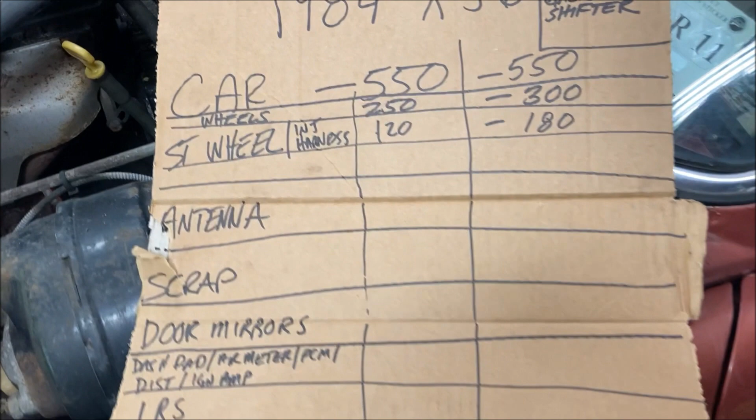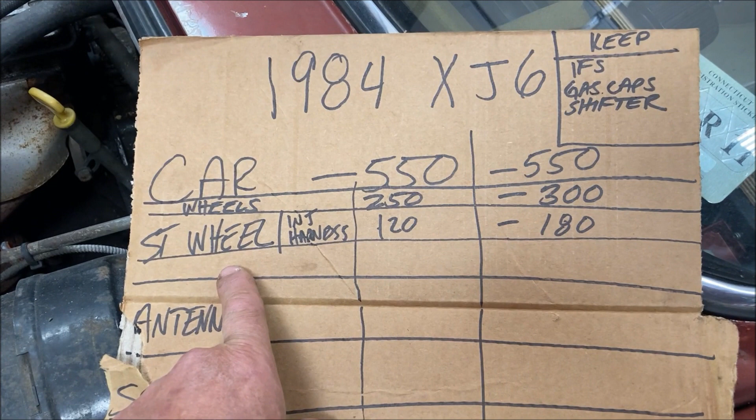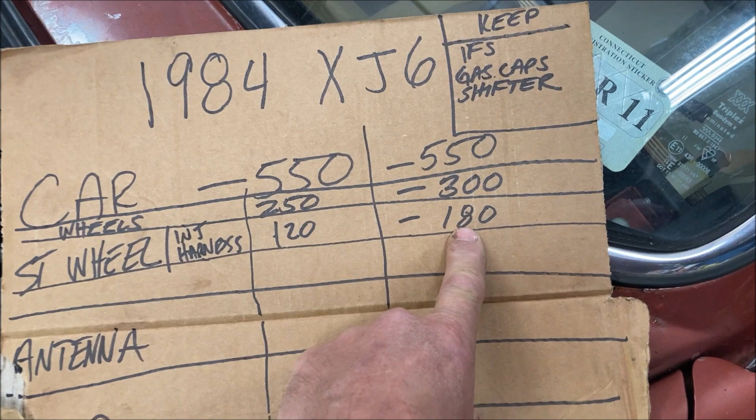This car did have a set of knockoff wire wheels on it, which were in nice shape. They sold right away. I threw them up for $250, they were gone. So that gets me down to $300 on the cost of this car. It also had a Nardi steering wheel in it that was beautiful, and I sold it cheap at $100, and the guy also needed an injector harness, so $120 for those. That gets me to $180 so far in this car, which means I have $180 invested in the front suspension. But we are nowhere near done yet.

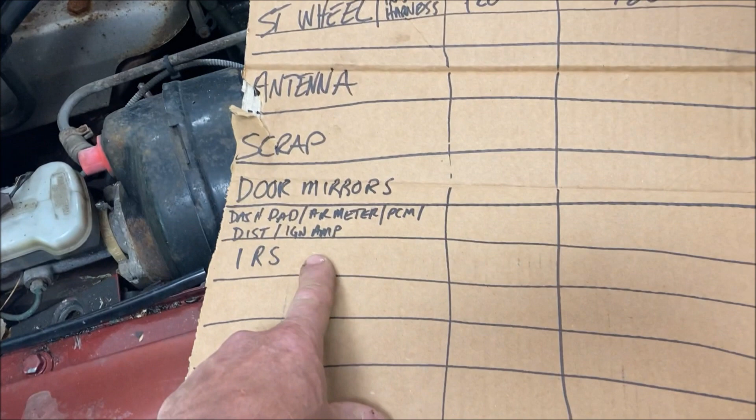I have people on the hook that want to buy some other parts, such as the factory power antenna, which is not very easy to find. This car has power door mirrors that all work, a bunch of miscellaneous things somebody wants, and we still have the independent rear suspension here to sell, which I normally sell at 250 to 300, and they sell pretty fast. So I'm not worried about it.

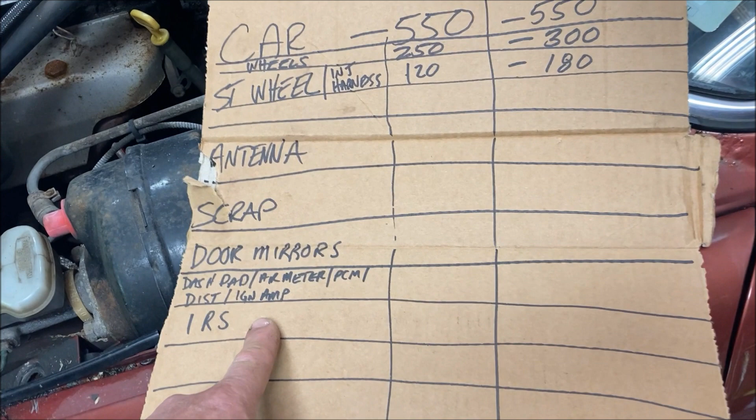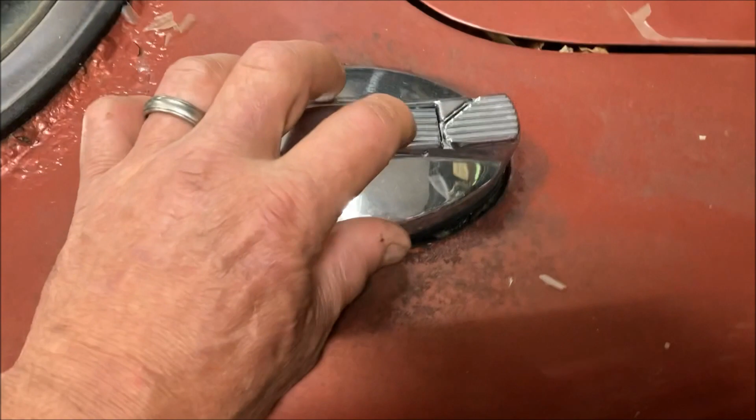So this car in the end is gonna help with the build a whole lot. Things we're gonna keep: not only am I gonna keep the independent front suspension for this car, we can keep the gas caps, because these Jaguars have two of these flip-up gas caps, and they're very cool. And I'm going to put one on this pickup truck, and I will show you how we do that.

The other thing I'm going to keep out of this car is the shifter. If you check out my little short I put up a couple days ago, these cars have a gated shifter, like a his/hers ratchet shifter, which is very cool. It's in there. It's a T-handle style, and I don't know if you can see the numbers on the shifter, but it has those lines around the 2 and the Drive. That's a ratchet shifter. If you push on that one way, you can bang it through the gears. I'll show you that a little later.

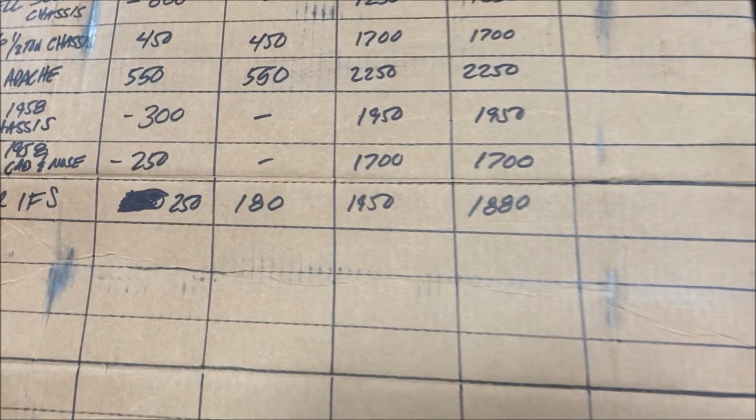Almost forgot, let's go over the numbers for the truck. This is where we are right now, and this is how things work when you do a build like this. So this is a 1956 Chevy half-ton we're building. But as I showed in the original video, we're talking three different trucks that are being used to make this. Here's how it all works.

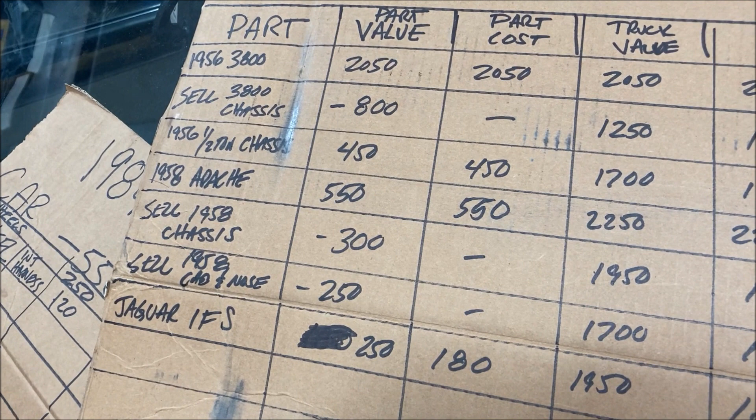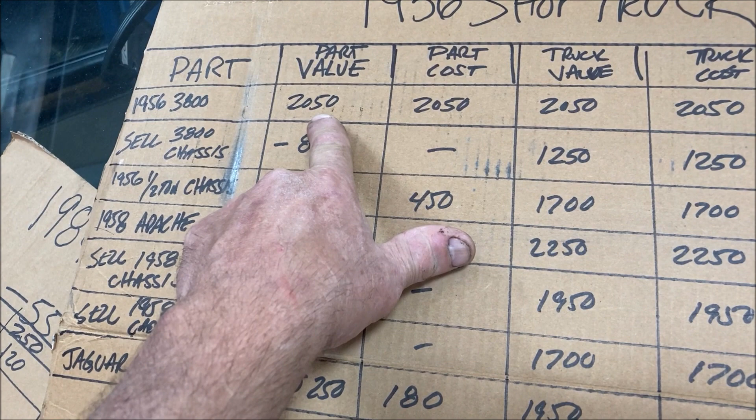The initial 1956 3800 I bought for $2,000 and $50 to go get it. Yeah, that's a cheap price, but that truck — this is why I tell people, don't give up on your project. That truck, somebody started taking it all apart to do something with it, gave up. Parts trucks or projects in pieces are not worth much. So I paid $2,050 for that, and you could probably do a lot better where you are, depending on what trucks sell for.

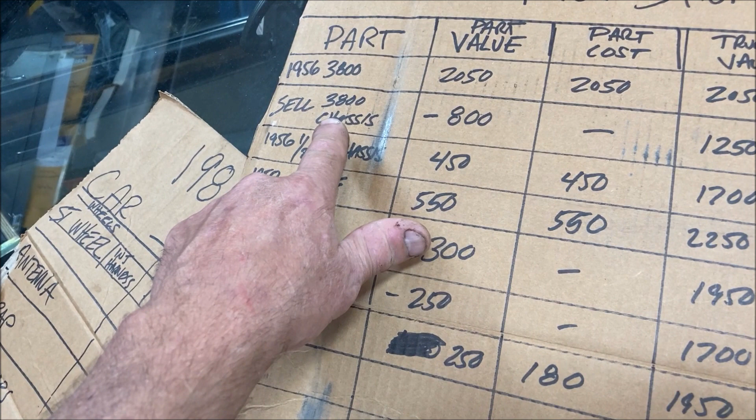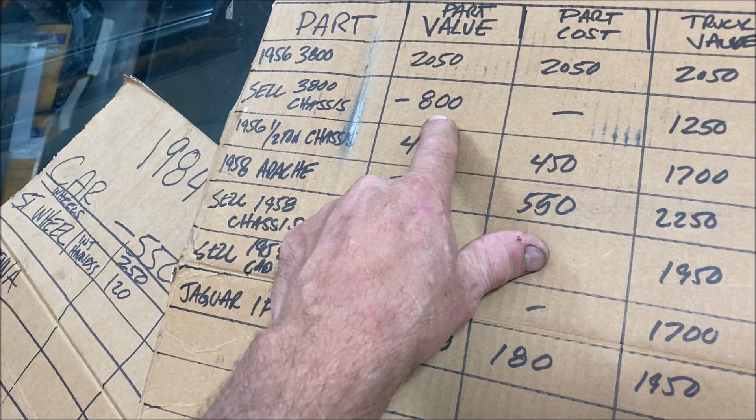But in the end, that's what that thing cost me, $2,050. Now, I'm not going to use the dually chassis. I'm going to keep that for the Mater build. That's got updated one-piece wheels on it, 19.5 tires, an $800 power disc brake conversion kit. It's got a lot of good parts on it. I think it's worth an easy $800 to call it as a value. I think if you wanted to sell that, you'd get $800 in a minute. So I'm going to call it $800, and I'm going to take $800 off the build because I'm not going to use it. That gets me down to $1,250 invested.

Then I had to buy a half-ton chassis. Found one on Marketplace, $450 with gas to go get it. Add that in, gets me to $1,700 invested right now.

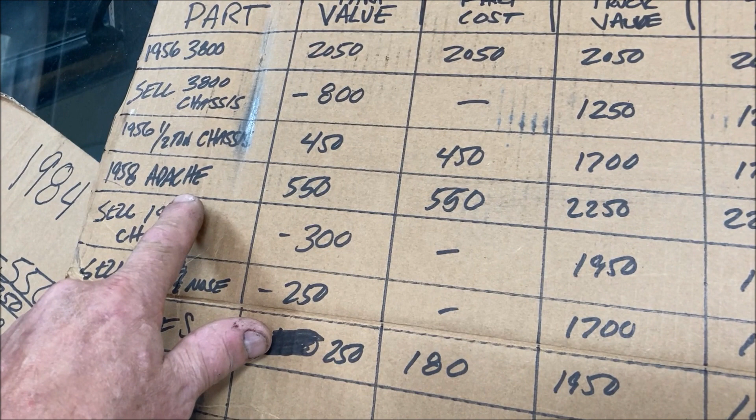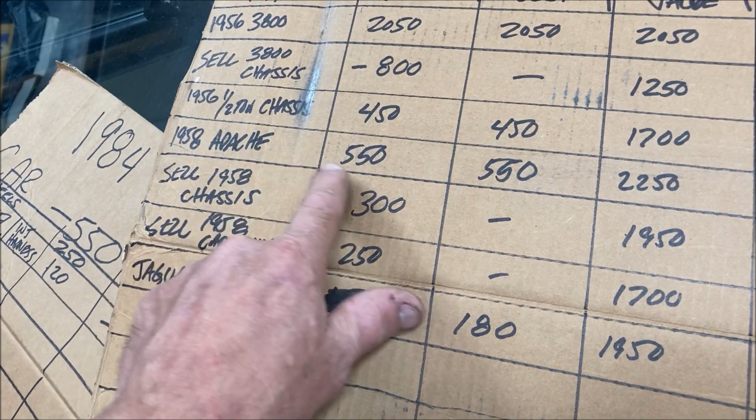Then we need a bed. I found this 1958 Apache. It's pretty roached, but the bed was the best part of it. And I can still use the cab for the Mater project, and the chassis is good. I paid $550 for that truck. Added in, gets me to $2,250.

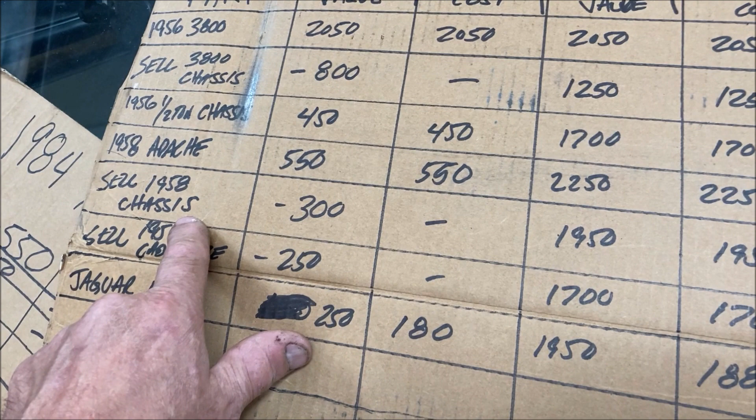As I just said, I'm not going to use the 58 chassis. I may put Corvette suspension on it, or I may just sell it as it is — I'm not sure yet. But it's easily worth $300. Take it off, gets me to $1,950 invested.

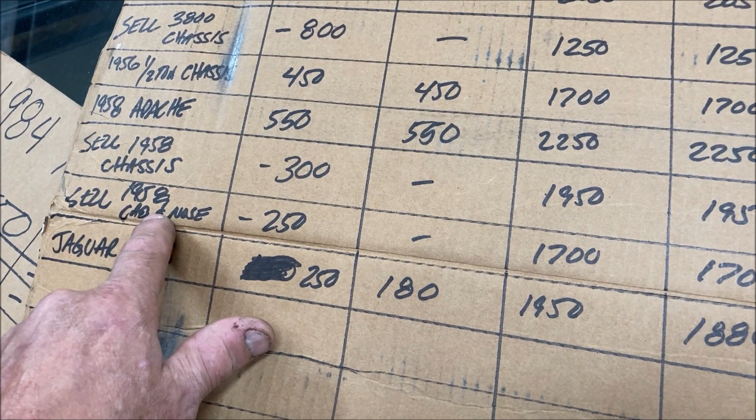I'm going to sell the 58 cab — well, I'm not going to sell it, I'm going to keep it. But I'm going to call it an easy value toward the Mater build of $250. Take that off, gets me to $1,700. So all in for the truck, the frame, and the bed, I'm at $1,700.

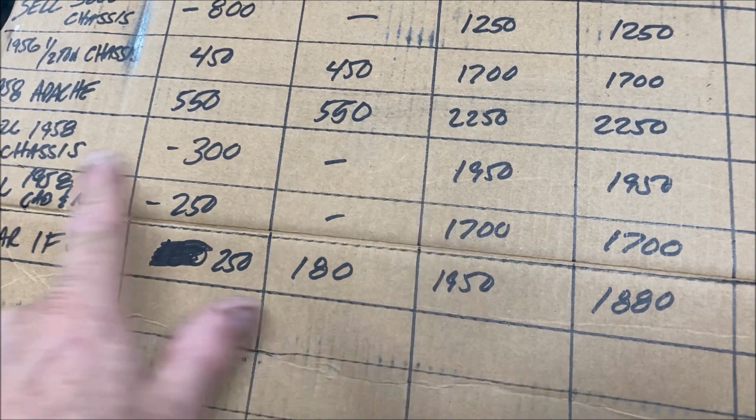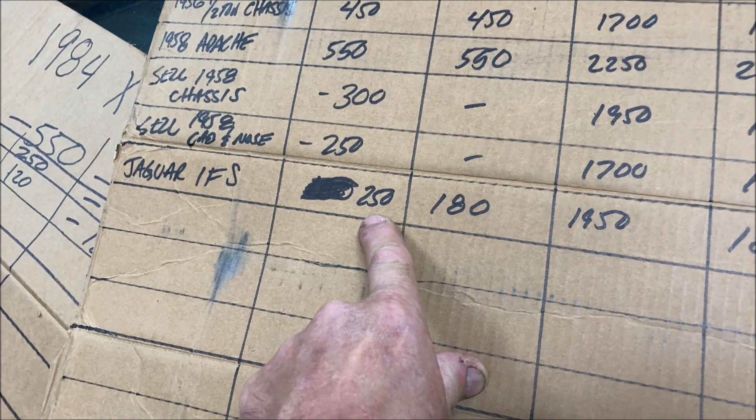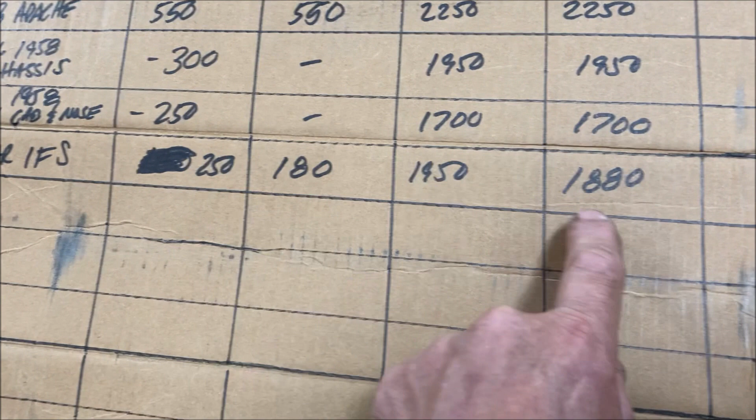So right now, out of my pocket, for the truck project and a front suspension, I am at $1,880. So that's how this is going to work. There's going to be parts that have a value and then the actual cost out of pocket. That's how I have to do it to make it a low buck build.

That front suspension, we're at $180 right now. I guarantee as time goes on throughout this build, that's going to go to zero, and the car will actually make money to offset the cost of the car. But that will happen. First thing I'm going to do is get this front suspension out of the car.

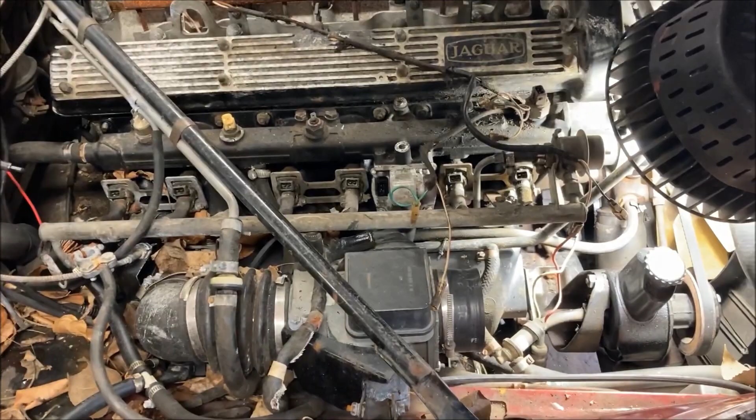All right, we're going to start under the hood of the Jaguar. Now I've moved the distributor out of the engine to make it a little easier to see what I'm doing here, but that's not needed. That's just mostly to get some space here so you can see.

First thing I'm going to do is disconnect the power steering lines. We have a return line here, just held with a hose clamp, and then we have the hard line here that threads into the back of the pump. This is just a Saginaw steering pump. Get some light down here. You can see the nut on the back of the power steering pump. Same as used on a bazillion GMs.

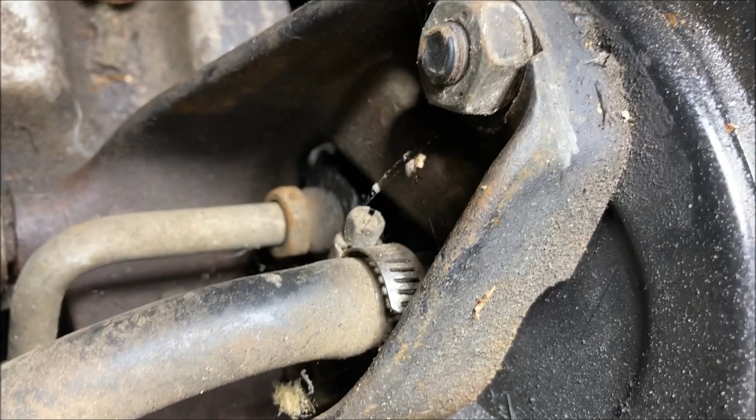You may or may not want to keep it for a project. I'm not going to need it for this project anyway, but I'm not going to cut those lines, mostly because, believe it or not, that pressure line that threads into the back of the pump also fits the LS truck power steering pump. So I can use that pressure hose on the conversion to the Jag front, and I don't even have to buy any power steering lines.

Same thing with the return. It's just a hose. I can cut that shorter. So that's the first thing I'm going to do. Get a screwdriver, take the return off, and should be a 5/8 inch wrench, and unscrew that power steering line from the back of the pump.

All right, so I got a drain pan under the car. Just take the worm gear clamp off the return line here for the power steering. There are worm gear clamps all over these engines, lots of them, and they're good ones.

So this is a major source of clamps. I take tons of clamps off these engines. They're everywhere, especially the long ones you use on fuel lines and such, and these are good ones. All the hardware on these Jaguars is top quality stuff. Most of the hardware you'll find, there's a lot of grade 8 on here, but there's no junk. So any kind of nuts, bolts, things you want to snag off these parts cars that'll help you in the future for anything, these are good sources for that stuff.

All right, so the clamp is off. See if I can get in here with a screwdriver and get the hose off. And then we'll go to the pressure side. All right, ended up cutting the return with a knife just to make it easier. That's draining down into the drain pan. Fluid looks good, which is good. Now I got a 5/8 wrench, and we'll take off the pressure side. All right, pressure hose is disconnected from the power steering pump.

We got one more thing to do up on top. The engine is actually bolted to the front suspension cradle, so I have to undo the motor mounts. There's two 3/8 studs with 9/16 nuts that we're going to take the nuts off, one on each side. That's all there is. Okay, I'll take you in for a deep dive on the passenger side.

Driver's side will be the same idea, but we're going to go down in here. Let's see if I can show you where the motor mount is. Where are we? There it is, right there. I will put an arrow to that if I can figure out how to do it on the video. But basically, you see that rubber piece there with the lines on it. It has a stud that goes right up into the engine block to that bracket. And there is a 9/16 nut in there. And we're going to get that off.

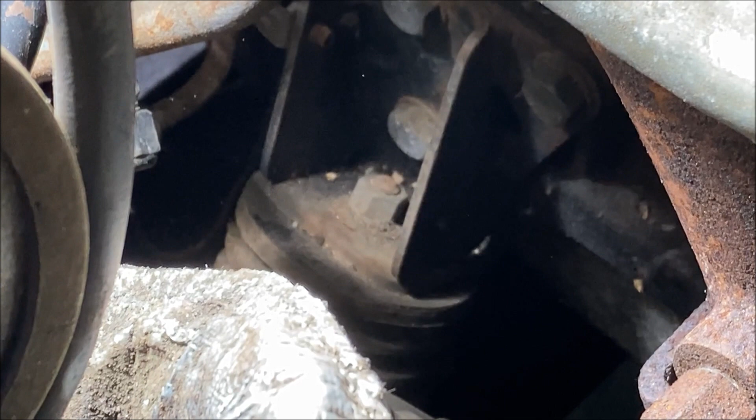There's a good look at the driver's side motor mount, that's the one nut we have to get off there. I had to take the passenger side off just using the open end of the wrench, couldn't get the box end around the nut. This side looks like I might be able to, depends on clearance, but they come right out.

All right, so power steering pressure line and return line are disconnected from the pump, both motor mounts are unbolted. Time to fly the car in the air.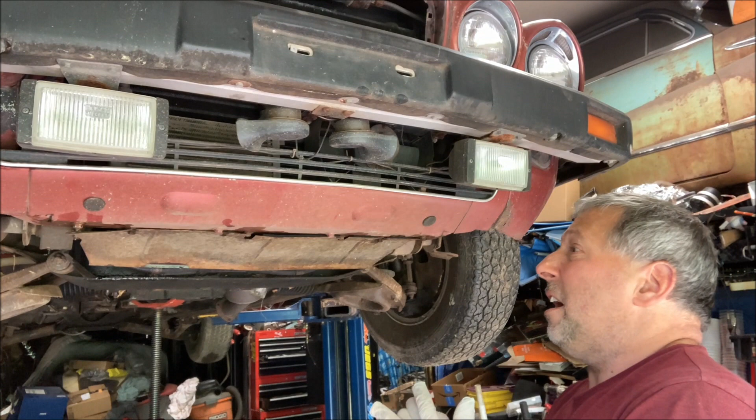Okay, with the car in the air, before I start going over all the mounting points on this thing, got to remove these fog lights. These are Bosch halogens, they work, I can sell those. Horns under the car.

And I'm going to remove those, remove the fogs. I'm going to remove this little splash shield under here so we can see what we're looking at, and we'll go from there.

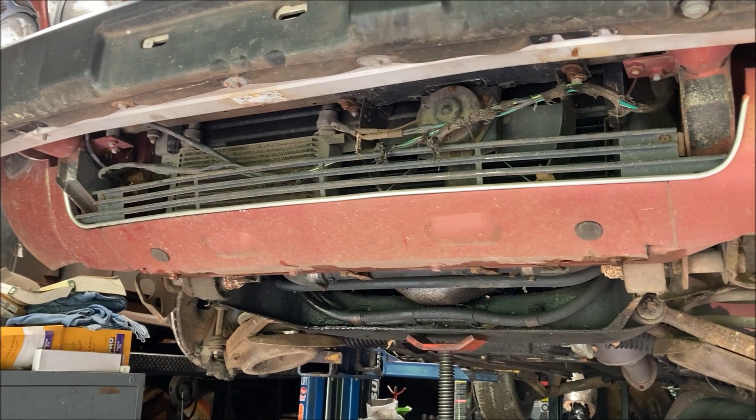Okay, fog lights are off, the horns are off. We may or may not use those. I'll probably use the horn from the Silverado donor that's going to give up the engine.

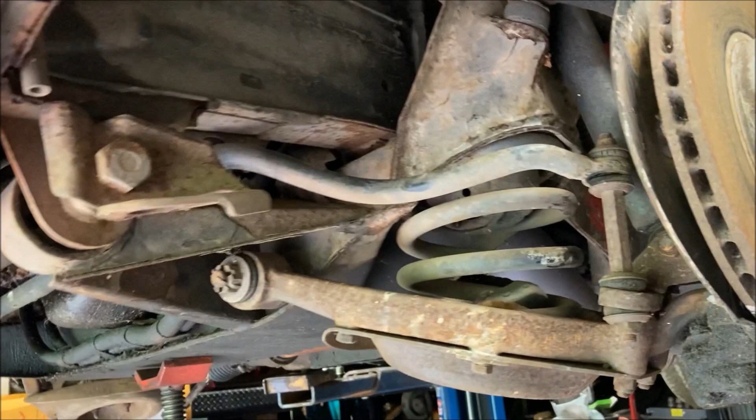But let's go over removal points for this front suspension. As I said before, the Jaguar is a unibody vehicle, just like a second-gen Camaro, first-gen Camaro, Nova, that kind of stuff. So the suspension is a separate subassembly that is removable. It is held in, and these are all the points we're going to get it.

There are big bolts in the front, one on each side. These guys here hold these outriggers up to the chassis. The sway bar mounts on each side here bolt to the chassis. The shock absorbers bolt to the chassis, but that's going to be the last thing we deal with.

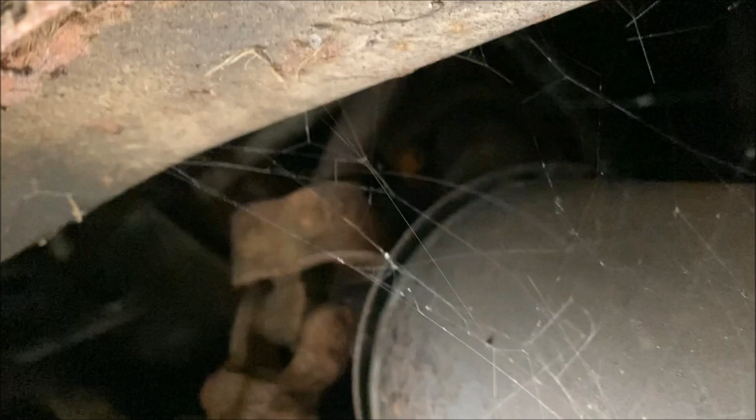We have the brake hoses going through the chassis, we're going to deal with that. The steering shaft - now, we could have cut this when we were on top of the car, or we can do it after underneath. I'm going to do it underneath.

I'm going to remove this cat converter. Part of the exhaust was already off this car, I don't know what they were doing with it, but it was in the trunk. I'm going to remove this to get room, and then it'll be easier to show.

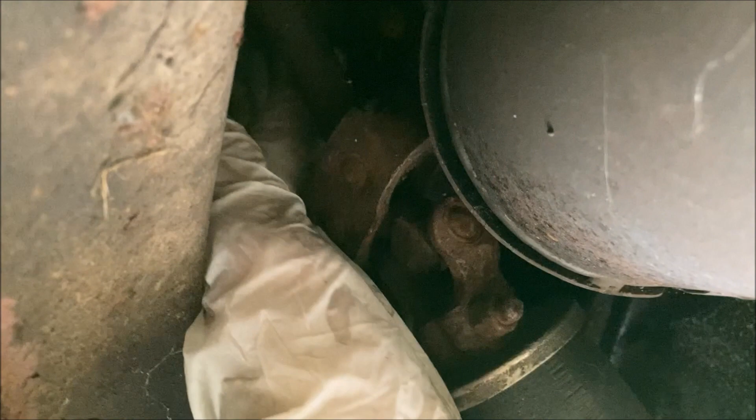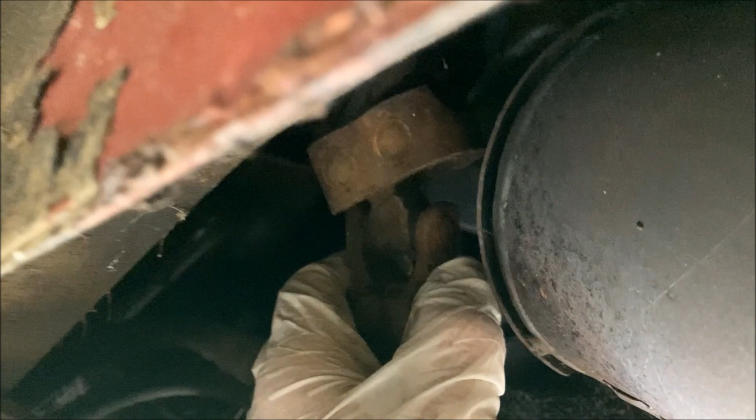But this 3/4 inch steering shaft up here, I'm going to cut that because I'm not going to need this joint. This is a special Z joint, it's called, and that's if you're going to soft mount this front suspension into a hot rod. I'm going to weld it, so I'm not going to need this.

The other rear point of attachment is right here. These are the rear mounts for the cradle that go to the frame. So there's not a whole lot holding this in. We're going to leave the shocks for last.

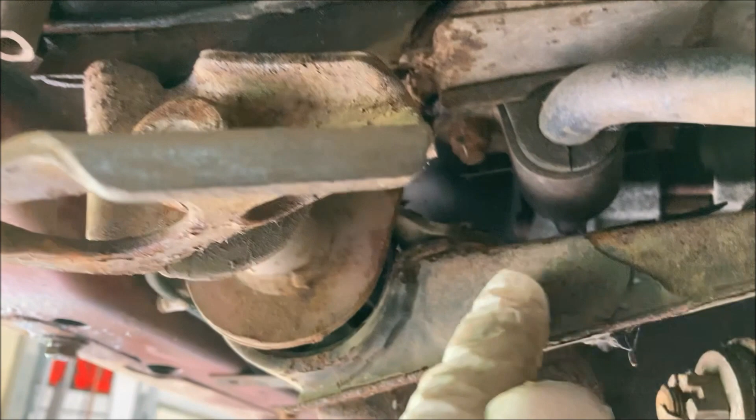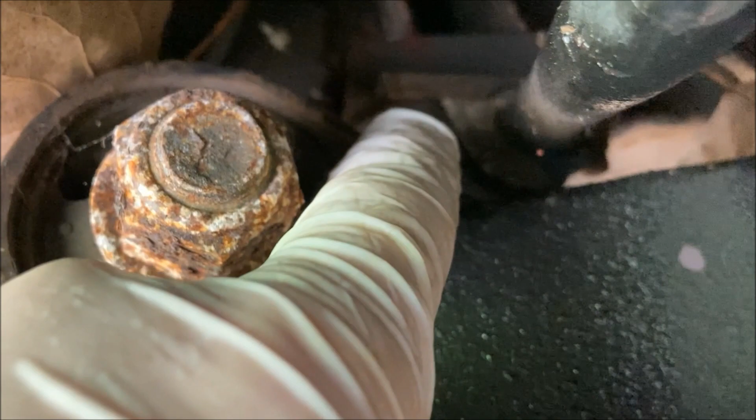What I'm actually looking at here, these sway bar bolts, I usually just torch them off or hit them with the plasma and cut them because they are tight to get to. But if you don't have a plasma, I'm thinking maybe I just sawzall right through this outrigger because I don't need it, and unbolt it, get it out of the way, and then I can get to these bolts. That may work easier for you guys who don't have a torch or a plasma, because those bolts are in a tough spot with this outrigger here, and they're in a nut and a bolt.

It's not a stud welded or anything, so you have to get a wrench on top and get the nut off. So it is easier to just blow them off with a plasma or torch, but maybe I'll cut these outriggers and try that. I'm going to try that. I've never sawzalled the outriggers off to take out the front end.

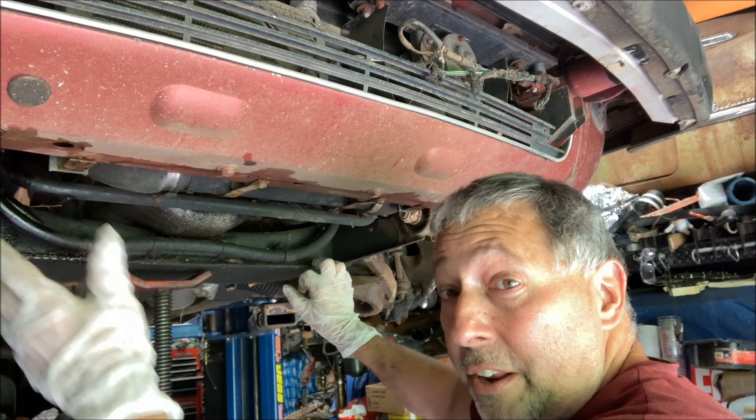It's not necessary, but it does make it easier if you don't have a torch or a plasma, like I said. If you're in a country where you're not allowed to weld this in and you have to bolt it in using your factory mounts, then you can't do this because you need to save these outriggers, and then you'll have to mess with getting those bolts out. But I'm going to get the sawzall and chop right through these outriggers.

Easy enough, so I cut through the first outrigger off the cradle there. Notice I have a jack holding this up because with all this work I'm doing, I don't want the suspension to move. If you're doing this on a car trailer or on the ground, you just put a floor jack under it, no big deal.

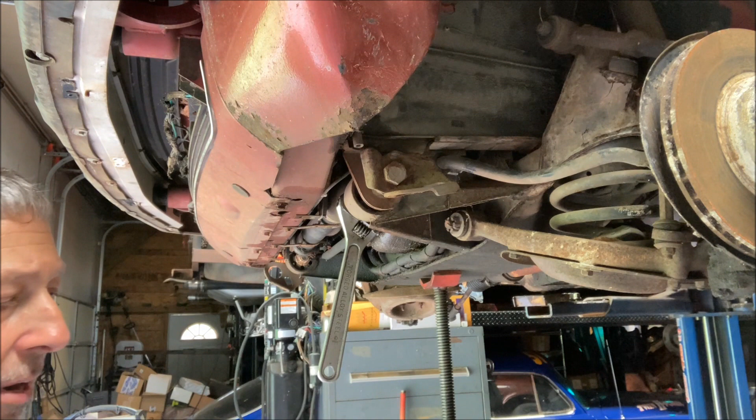So these big bolts here just have a nylon lock nut on it. I just got a wrench on it, big adjustable. This is a 1 1/8 socket. I don't think it'll be ridiculously tight to get off. I could be wrong, we may need a cheater bar because I can't get any leverage. Let's see. There we go.

There's the piece of the outrigger we cut off with the bushing. Don't need it. Long bolt, don't need it. Toe bracket, Jaguars may need it. Gonna do the same thing on the other side, I'm just gonna cut right through that with the sawzall and remove it.

That actually worked out pretty well, hacking those off. I'm going to end up trimming them back anyway to make them cleaner, but that now gives a straight shot to the sway bar bolt, so that works good. But I didn't even think, you know, I'm used to these Jags. Let me show you some stuff here.

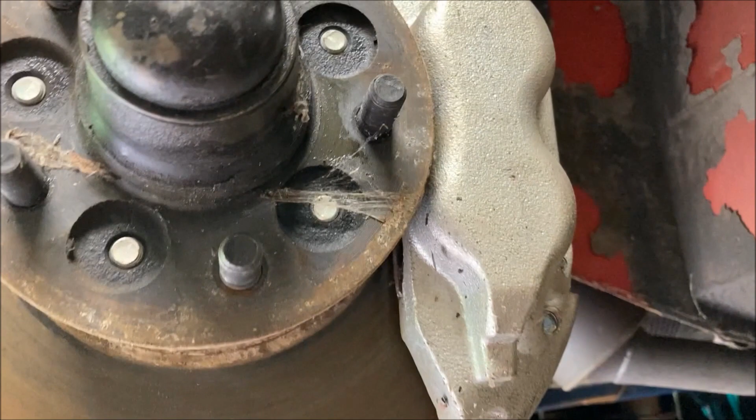We got to evaluate this front end because this is the one we're going to use, right? Just looking at it, which was a surprise, these calipers are obviously recent, which means the brake pads are probably recent too, so that's cool. This car has brakes, they work, so the hoses should be good. We'll see if we replace them or not. If they're good, they're good.

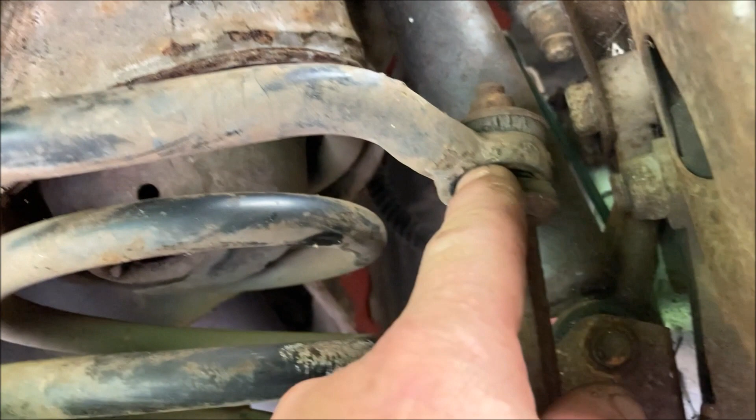One thing I do see, the upper ball joints, the boots are torn up, so it looks like we're going to need ball joints, and if we're going to do tops, we're going to do the bottoms. They're cheap, there's no reason not to. Sway bar end links, these are shot, so we'll find something. I may have the bushings in stock for that. They used to sell them cheap on RockAuto, but last time I looked I couldn't find them, but they're just standard end link bushings, nothing big.

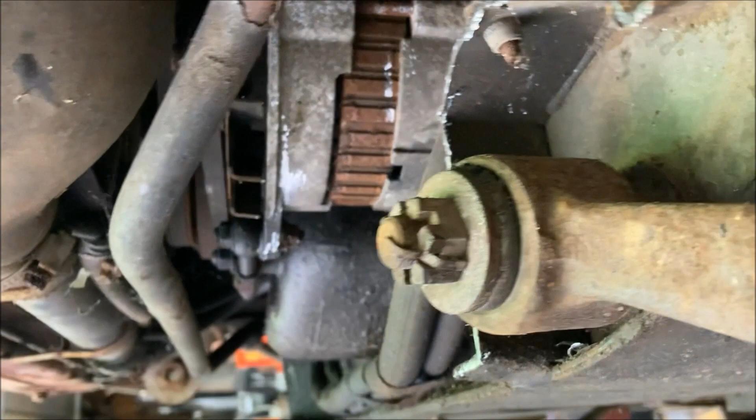Now the biggest thing about these Jag fronts, or at least the biggest pain, these bushings on the lower here, they don't really wear out. They're always going to have some cracks and stuff on the outside edges, but it doesn't mean anything. When this is apart, grab hold of the lower control arm and see if you can move it. Generally, they don't wear out. So just because they have some cracks, don't try to replace them.

They're cheap, but here's the deal. This lower fulcrum bolt that goes through the frame, through this cross member, and comes out here in the back, it'll be easier to see when the front end's out. It slides through a tube inside this cradle, and it is very common, almost 100%, that at least one of these bolts is going to be seized inside this cradle. I had to make a tool that fits over the end of this, and you can hit it and knock on the bolt and bang on it. I've had them so bad where I had to cut open the bottom of the cradle to heat up the tube to allow the bolt to come out.

In the end, not worth it unless those bushings are worn, and they're really not going to be, because most of the time these cars have under 100,000 miles, and even I've had them with 150,000, and those bushings are not worn out. Even though they may not look the best on the outside here, the insides are just fine.

So just looking at this front end, we will be doing at least a partial rebuild. The tie rod ends, I think, are recent as well, they're tight, so I'm not going to have to worry about that. And we won't have to worry about the brakes, and the rotors look fine too, they'll clean right up, no problem. So it won't cost a whole lot to replace what we need on this front end, but you check them out and see what you need to replace on it.

So anyway, that worked out good. The next thing is going to be to get the sway bar bolts out of here. All right, time to get this sway bar out. I've got a ratchet on top with a 9/16 socket because, like I said, they're not studs, they're nuts and bolts.

There's one. Get number two.

Well, you know, I think I'm going to cut those outriggers from now on. That's much easier than torching them. That's for sure.

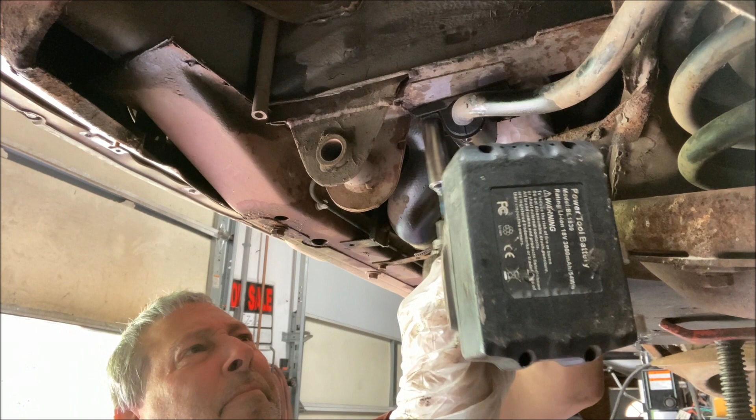Very nice. All right, that's it for the sway bar. Let's move along. Okay, next, we take off the rear mounts.

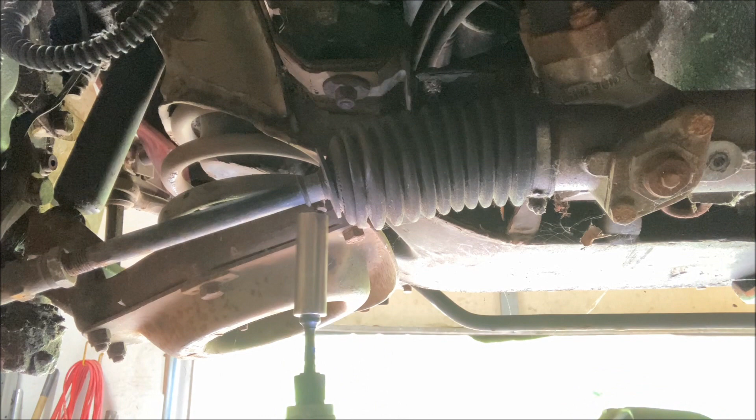One bolt on each side, 9/16. Can I get to it like this? I can. Don't be scared. It's just, you know, 1,000 pounds falling on your head, that's about it. All right, so then we'll come to this side and do the same thing. Get you over here, we're going to be right here.

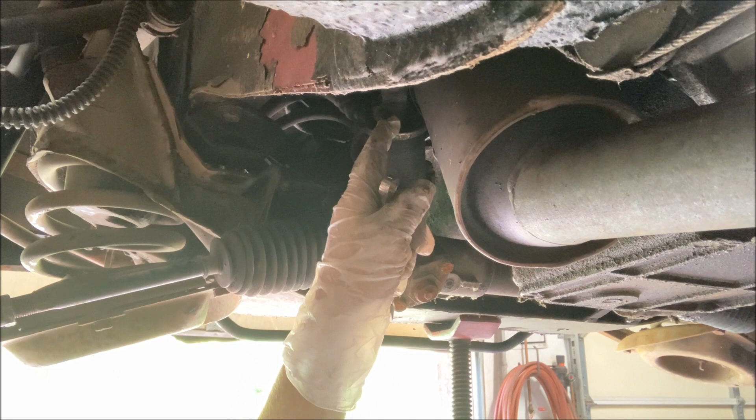That's that. Okay, so with the rear cradle mounts disconnected, I'm going to disconnect the steering. It's going to be the easiest way to do it is just unbolt this U-joint from the rack. I know I talked about cutting the shaft on top, that's usually the way I do it, but I've never used these U-joints because I always weld in these things, so I don't need it anyway. So it's just as easy to unbolt it here. You just need a 1/2-inch wrench and a 1/2-inch socket, unbolt it here, and then can just pry the joint up off of the rack. The joint is a 3/4 inch 48 spline, so that's the kind of joint we're going to use when it comes time to build the steering.

And with the bolt removed, you'll just get that off of there, unless it's really stuck like this one is, because it's never been off. Is that moving like that? That shouldn't move like that. That's something we got to talk about. There we go. All right, steering is disconnected.

Now, just notice something we have to talk about. Look how much this steering rack is moving. What that is, is the bushings in the steering rack. They become oil soaked because these engines leak oil, and it makes this rack move around and destroys the handling. So when we get this apart, I'll show it to you, but it's one thing that is an absolute must: if you use a Jaguar front suspension in your build, those bushings have to be removed and replaced with polyurethane. Don't use rubber. Okay, that's out.

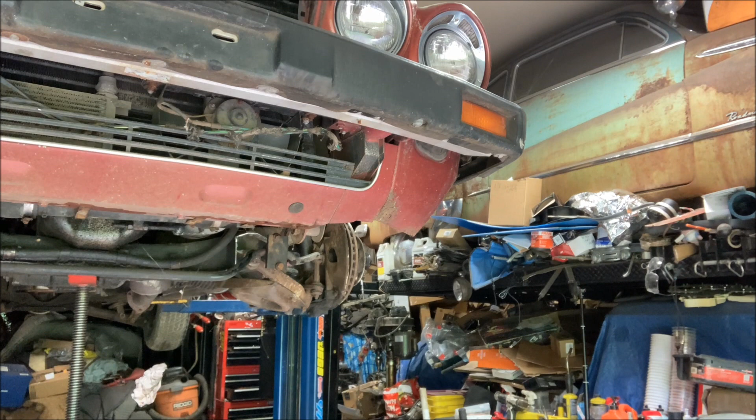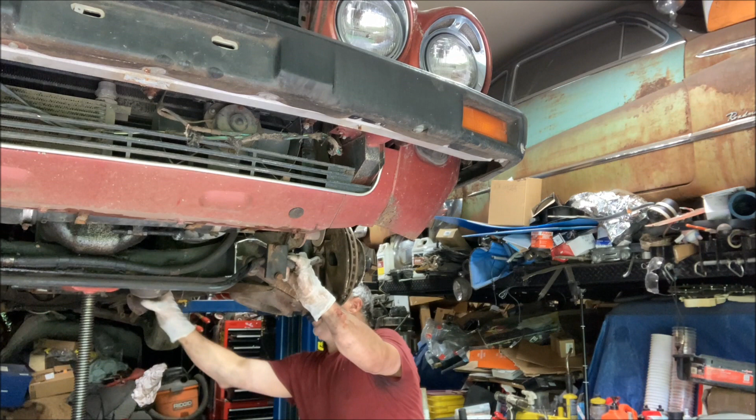This looks like it's okay and it's not hanging up. That's below the stud, so I'm gonna lower this down a little bit here. And that is it, this whole front suspension is now loose in the car. All right, so now we got a couple other things to do. I'll get this thing out of here.

Okay, one more item to deal with are the brake hoses. Now, you don't want to just cut these. I mean, I guess you could, but on the other side of it is a 10mm nut like this. You can buy them online, but why buy them if you have them? And inside here, once the suspension's out, there's some other brake lines that use those 10mm nuts, and I cut them all out and keep them all as spares. But what I'm going to do is caveman this. I'm just going to get the cutoff wheel and cut right through the body, chop a section of this inner wheelhouse right out, pull this whole thing out, and cut the brake line. It's caveman, but it works, and you get the parts you need. All right, let's cut this out.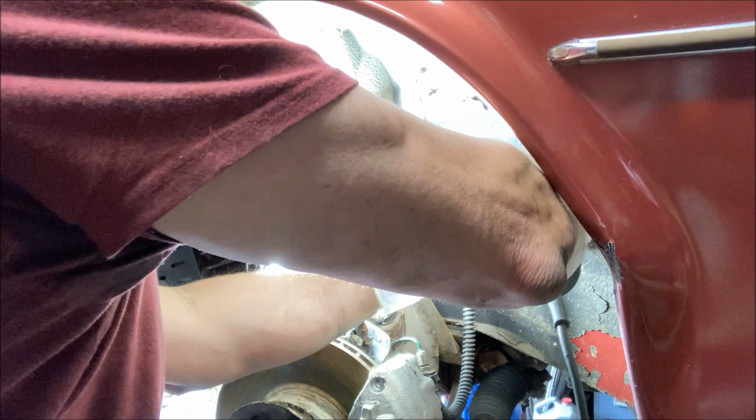Got it cut loose. And I couldn't get all the way around it. I usually use a plasma when I do that, but...

We'll do it on 3 sides. Unfortunately, because I was doing this with the cutoff wheel, I hit my upper bushing there. So depending on how bad that is, we may have to replace that bushing. They're easy to replace, not a big deal.

Hey, just another expense on a budget build, right? All right, get this out. And there's our brake line - it just broke from me twisting it. So that's the 10mm nut that I need to hook this up to the new build.

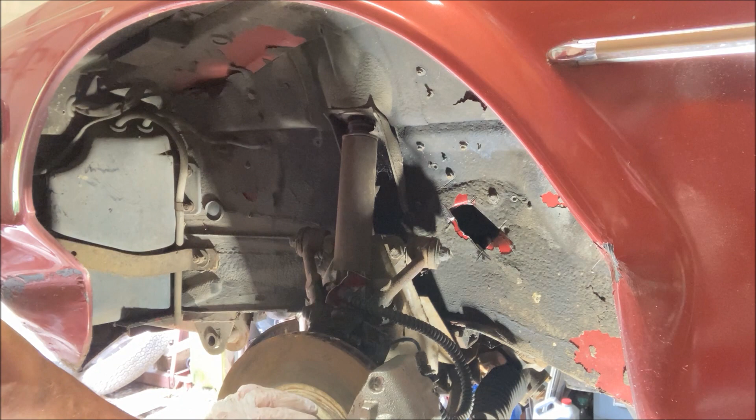All right, I'm just gonna hang this out of the way here. I'm gonna move to the other side and cut it the same way. Okay, so both brake lines are cut loose from the body and stuck in with the front end. You could always do some of that from the inside, from the top if you want to in the beginning. I just do it like that.

The car is lowered down. The front wheels are back on, it's just touching the wheels right now, so the weight's on the front suspension a little bit. All that's left is the shocks - that's what's holding this thing in. So I'm gonna take the shocks out, or unbolt them rather.

And that's all it's going to be holding this thing in the car. Now this shock is accessible just like this, no big deal. Driver's side, you have to remove the overflow tank - no big deal, got to get it out of the way. So like I said, for the passenger side, it's easy to get the shock out.

The stud's right there. Driver's side, it's underneath this expansion tank, which is another neat little item to keep if you ever need one for a swap or something. It's metal, not plastic like the LS in the truck. So a few bolts, we'll get this out of the way and get to the shock.

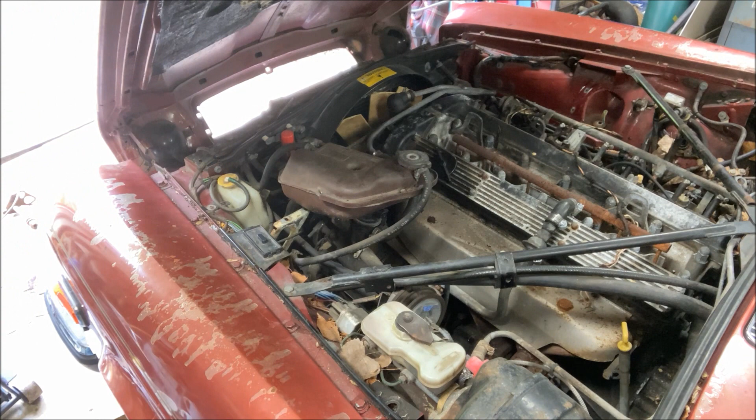And that's out of the way. And the shock is right there. Probably saw the engine move there. Okay, that should be it. Should be able to raise the car and drop the suspension.

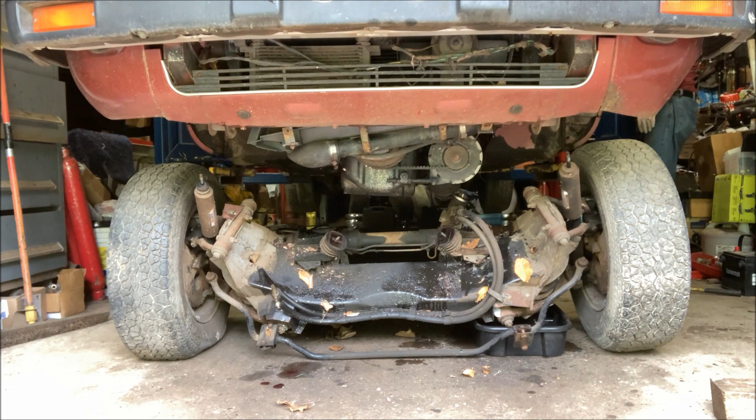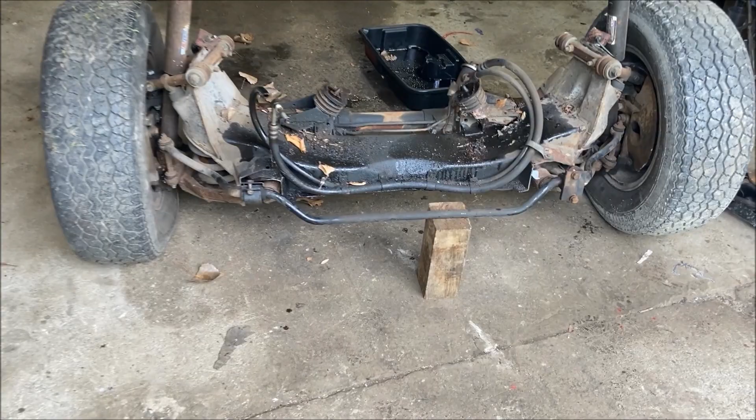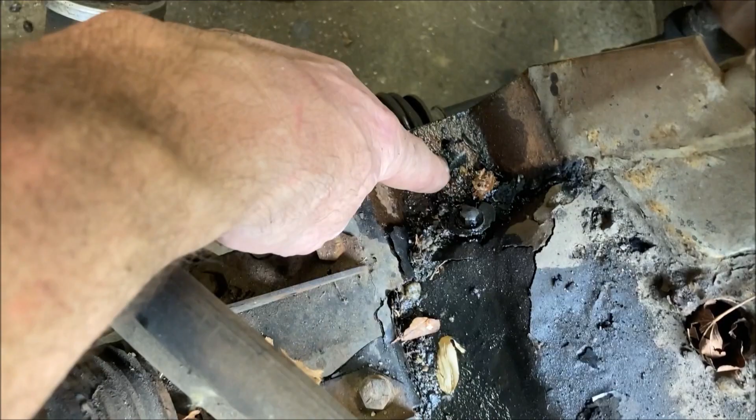And there you have it, your very own Jaguar front suspension for your hot rod. You can see all the points of contact that we disconnected because we cut off the outriggers that had the bolts. Sway bar, the rear mounts went here, brake lines, shocks, disconnect the steering. That's it. That is all.

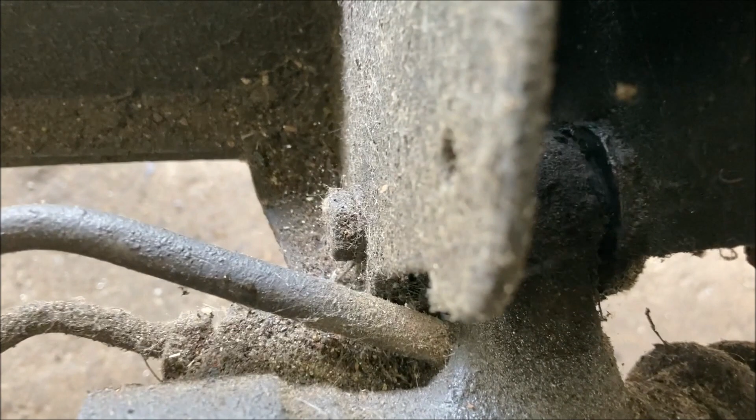Now, the steering rack, the bushings I was talking about - there's 3 of them. One in there, one on that point, and then one there. You can see there's nothing there - the bushings are gone, destroyed. So that'll get taken apart. We'll put the polyurethane bushings in there and do that while the front end work's getting done.

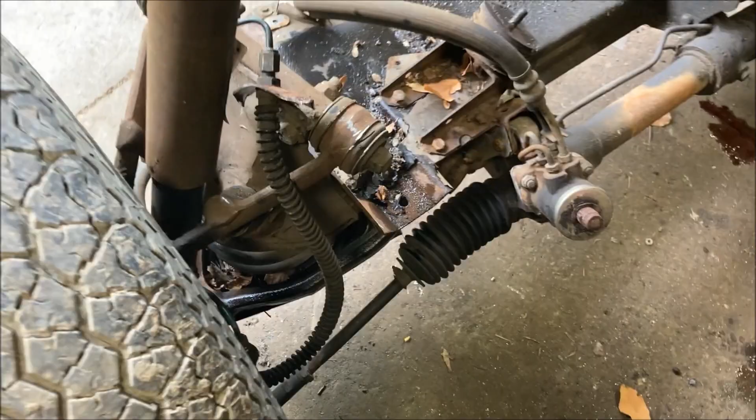It's going to need ball joints for sure, the steering rack bushings, and that may be it. You know, there may not be anything else. I put a cut in that bushing, so I think that's going to get replaced. But other than that, here's our power steering lines. That's all there is to it.

Motor mount studs that we took the nuts off of. Very simple. Needs a good cleaning. This is going to work really well in the truck.

So the next - I guess the next video - we'll get this cleaned up, get it installed. We'll get the chassis in here and start lining this thing up and figure out where it's going to be. Not going to rebuild it till after all the fabrication work is done. Once the chassis is pretty much assembled like I want it, blow it apart for rebuilding, paint if we're going to do it, any of that kind of stuff.

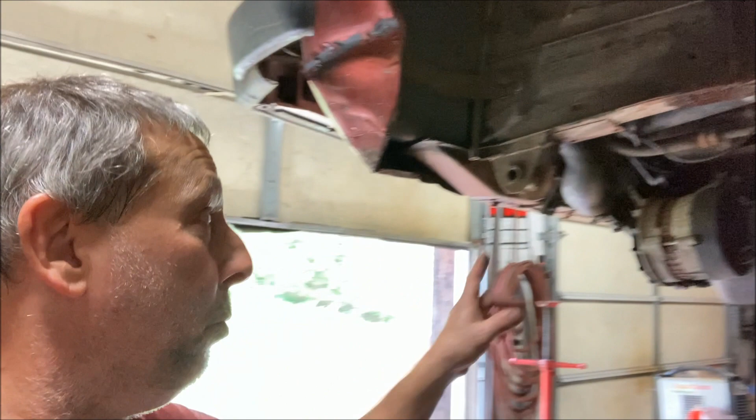So that was pretty painless, right? And in the background there, you can see the engine just hanging. Yeah, it's wedged on the front, so yeah, it won't fall out, but it's jammed in there. And now I got to get the transmission out of this thing because somebody wants the transmission. So you'll see - maybe the engine will end up on the floor.

We'll see about that. Anyway, I got to finish stripping this thing out to get it scrapped out. I got to get the rear suspension out and all that mess. We'll see you on the next truck video.